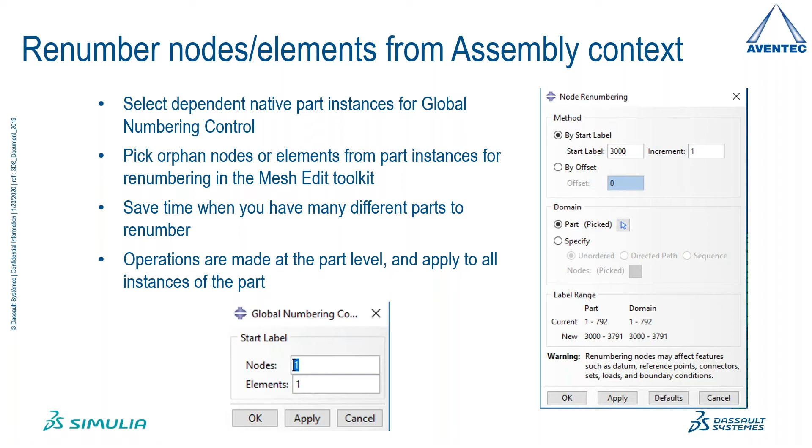Renumbering the nodes and elements from an assembly context is a nice upgrade as well. Now we can pick an orphan node or element from an orphan mesh, or even from a part instance, and start the renumbering according to a certain sequence. This feature is very important especially for folks that deal a lot with pipe elements and elbow elements, especially with the inclusion of the PSI elements, because the numbering is quite critical. So this is a very nice feature to consider.

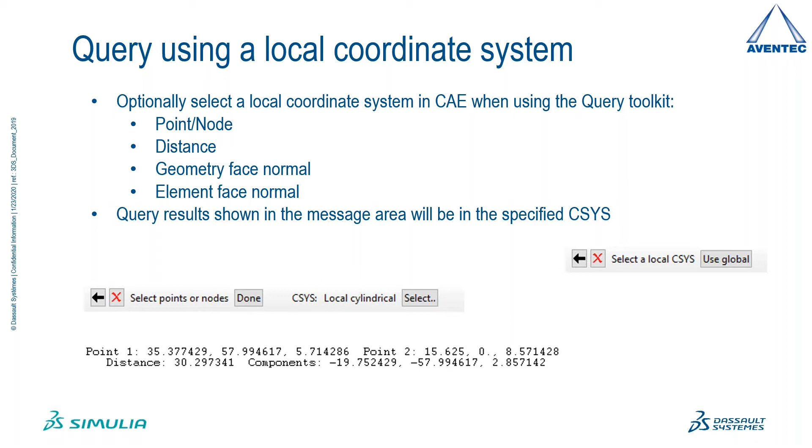Query using the local coordinate system. Prior to this release, we could only query in the global coordinate system, but now we could switch to the local coordinate system. And we could query based on point, node, distance, geometry face normals, or element face normals as well.

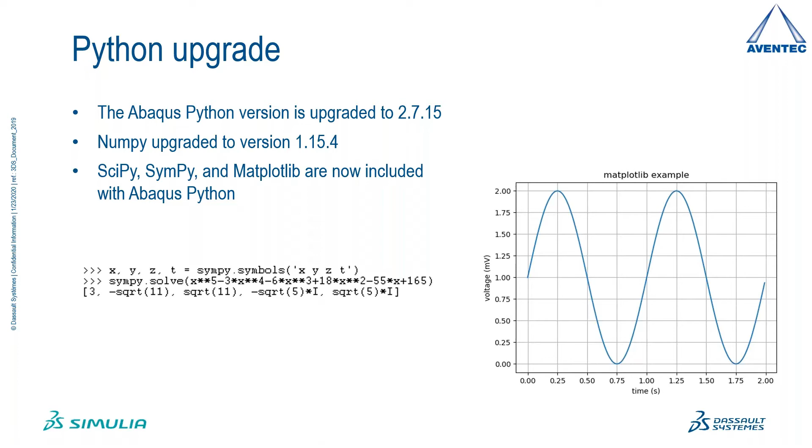For the folks that like to use Python within Abaqus, or a lot of us, we have our own scripts. So there was an upgrade to the Python version from 2.7.9 to 2.7.15. Again, not to the 3.4 as some of our clients anticipated. There's also the inclusion of the SciPy, SymPy, and Matplotlib libraries, which are now included with the Abaqus Python, and they're accessible through a command window.

Contact initialization for Abaqus explicit could be picked from the CAE window. Based on the creation of the contact initialization, the user can pick directly if the contact initialization is Abaqus standard based or Abaqus explicit.

And now the *TENSILE FAILURE material model is supported from CAE. In the past it was always a pain to include it in the INP file. This model is used in conjunction with the Johnson-Cook plasticity model, mainly in Abaqus explicit. And it's basically a sub-option for plasticity models or for equations of state for the folks that deal with smoothed particle hydrodynamics, for example.

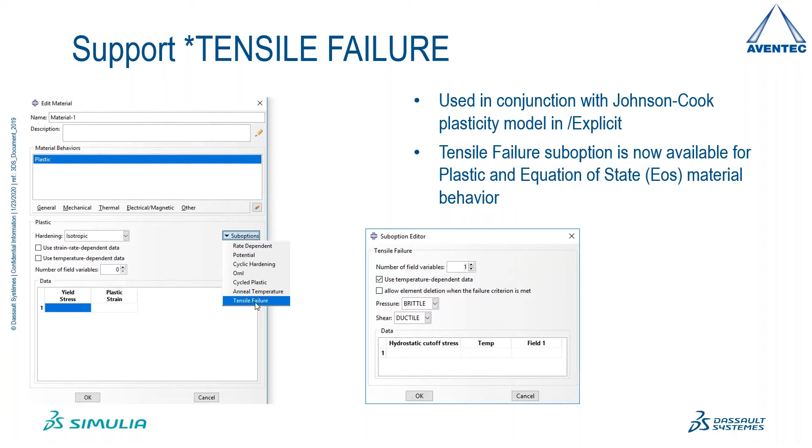The evaluation of Hyperfoam material test data. That feature has been there for a while, where we could evaluate material test data from viscoelastic and hyperelastic material models. Now we included the Hyperfoam material models as well.

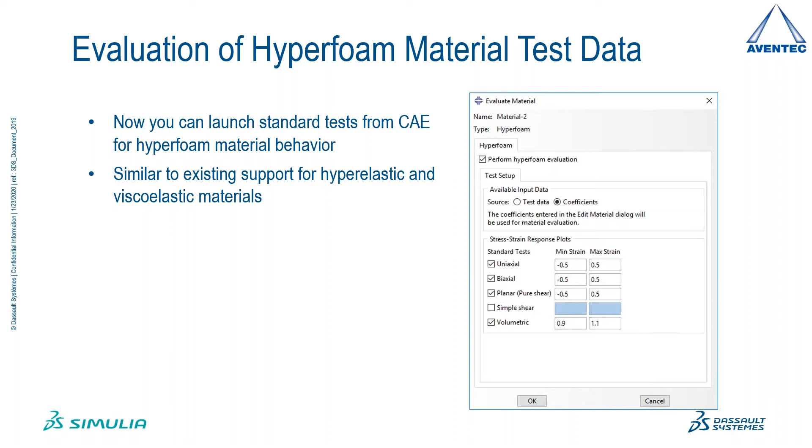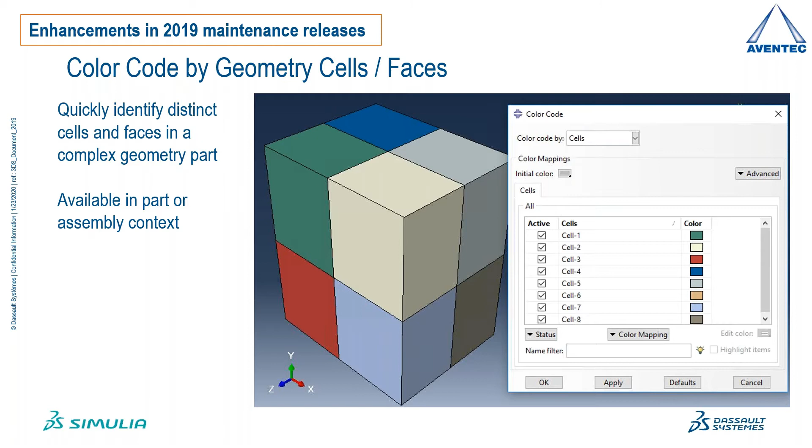The color code, which has been introduced in, if I'm not mistaken, the latest maintenance release of 2019, which is hotfix 3 or hotfix 4, pardon. So this partition or color code by geometry face can make the visualization easier, especially for complex geometries or even for complex assemblies.

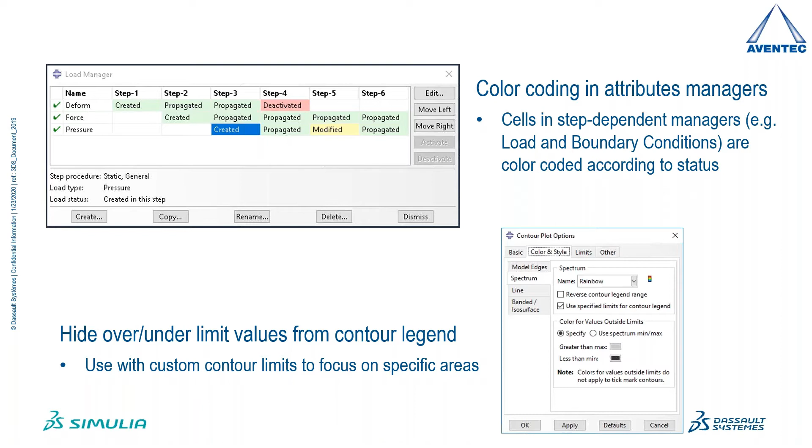And the color code in the attribute managers, for example, for the load manager, we can see that there's been the introduction of color coding based on red, green, and yellow: modified, deactivated, and active. This feature has been introduced in the Abaqus 2019 hotfix 3, so it's been available since last year's release, and it's been upgraded there. So that's basically the main features of Abaqus CAE.

Now we're gonna switch gears and talk about contact and constraints a little bit. So one of the main issues was to deal with the interference fit, especially for Abaqus explicit. We know that the Abaqus explicit solver handles contact problems with more robustness compared to standard for the most part. But when it comes to overclosure, sometimes we have a lot of issues, and it's been a little bit tricky to solve the interference fit for dynamic problems that are easier to solve with Abaqus explicit compared to Abaqus standard.

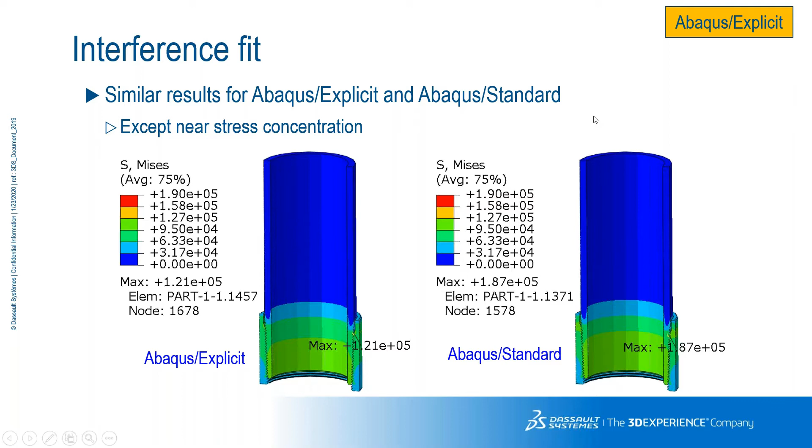Initialization control for general contact. Previously we used the keywords *CONTACT INITIALIZATION DATA and contact initialization assignments. These keywords were only applicable to Abaqus standard, and now they are available in Abaqus explicit as well. And these options also include the contact clearance assignments. The basic keyword specifications to treat initial overclosures, for example, for interference fit, are initialization, inclusions, exclusions, assignments, etc. So these keywords are also now available within Abaqus explicit.

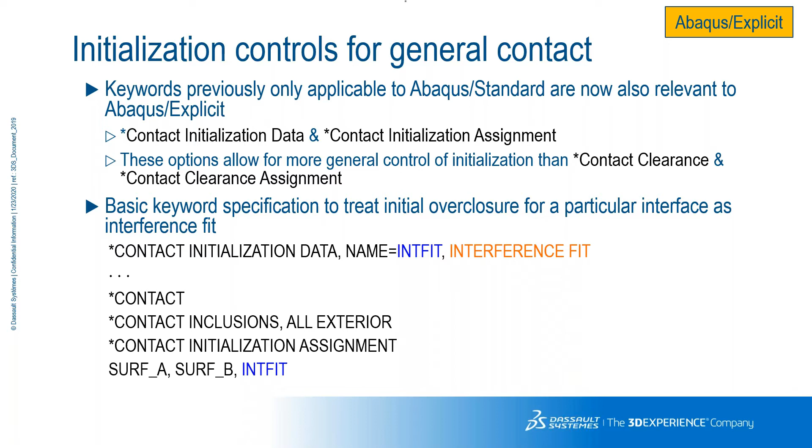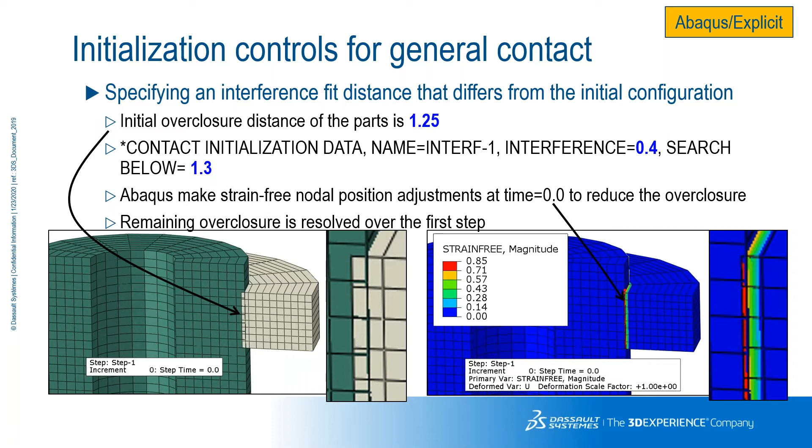So just carry on with the contact initialization controls for general contact. Now we can specify the interference fit distance that differs from the initial configuration, depending on a percentage of the initial overclosure. So we can include certain keywords to specify the distance. Again, these capabilities have been available for a while in Abaqus standard, and they are being included in Abaqus explicit in this current release.

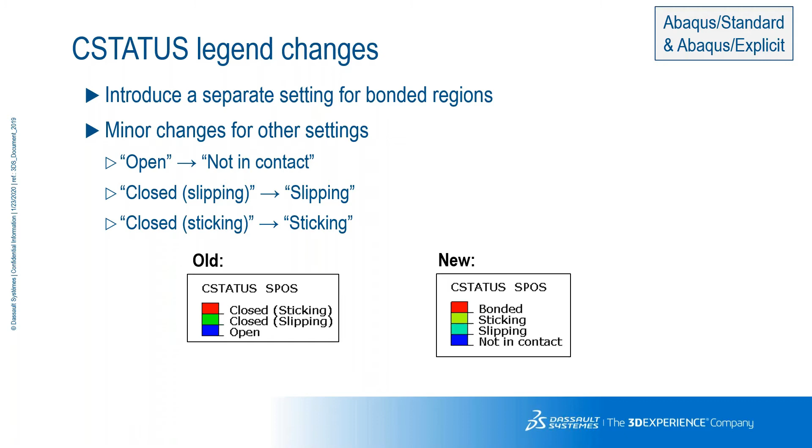The thermal expansion of rigid-like features. I know it might sound a little bit tricky, but sometimes we use rigid bodies to make our analysis quite lighter. And at the same time, we need certain information when it comes to thermal analysis, especially the thermal expansion, if you want to include it.

So now we could include this feature in the rigid bodies, kinematic coupling, beam multipoint constraints, and link multipoint constraints, which is very nice and useful, and it's comparable to or similar to the Nastran RBE2 capability.

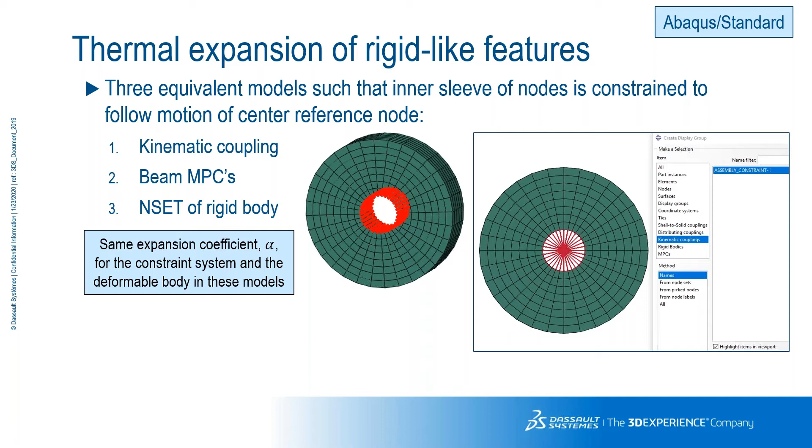So I'm just going to show a quick illustration here for the 3 equivalent models, such that the inner sleeve of the nodes is constrained to follow the motion of the center reference node. So there are 3 different ways to do it, either using a kinematic coupling or beam MPC or a nodal set of rigid body. And in these 3 different scenarios, we can still include the expansion coefficient as part of the simulation.

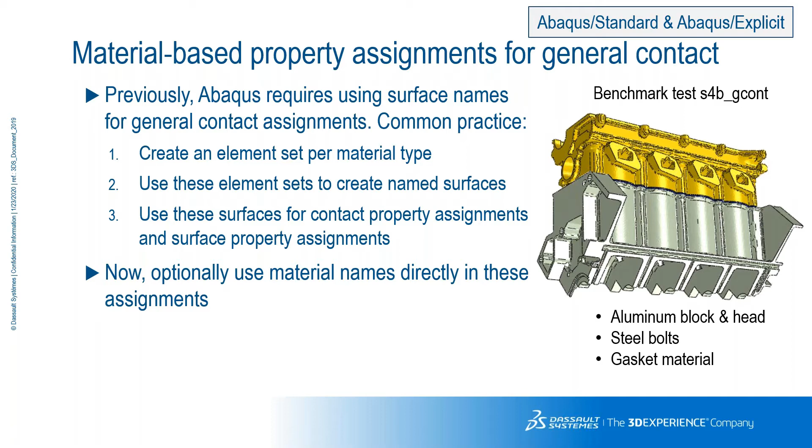Material-based property assignments for general contact. I remember a couple of years ago, 2018, and then upgraded in 2019, we talked about the friction coefficient material-based assignments. That was a nice upgrade for the general contact capability within Abaqus Standard, and also within Abaqus Explicit. Now we can also include the material-based property assignments instead of only section-based or part-based assignment. So from a general contact perspective, it would make life quite easier, especially for large assemblies.

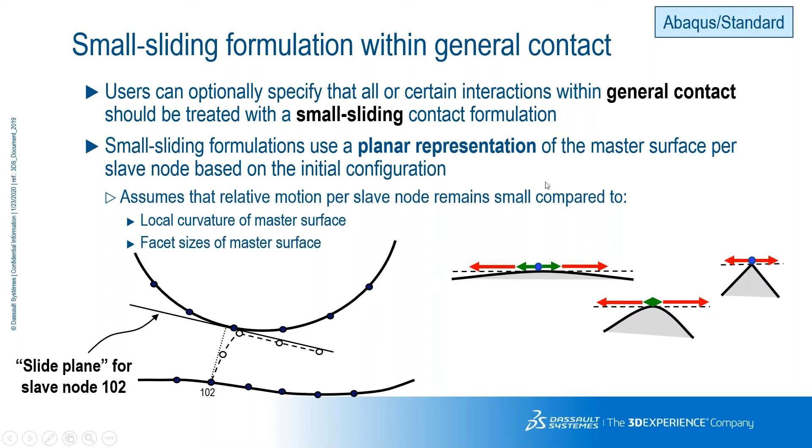Small sliding formulation within general contact has also been included. So of course, when we deal with general contact, we also have to keep in mind the way that the slave surface is moving accordingly or opposing to the master surface. So basically, we can distinguish between small sliding and finite sliding according to the convexity or if the surface is planar. So this consideration has also been included in general contact within Abaqus Standard.

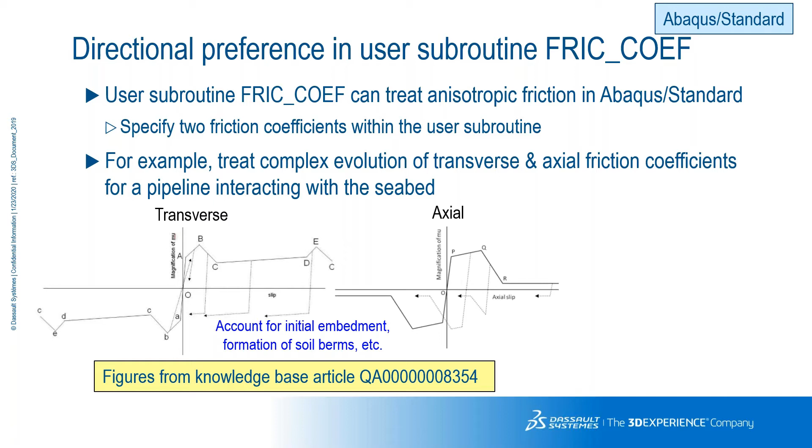And then, of course, there's a directional preference in the user subroutine friction coefficient that can treat anisotropic friction in Abaqus Standard exclusively. And then we can also specify two different friction coefficients based on, I would say, transverse anisotropy within the same user subroutine.

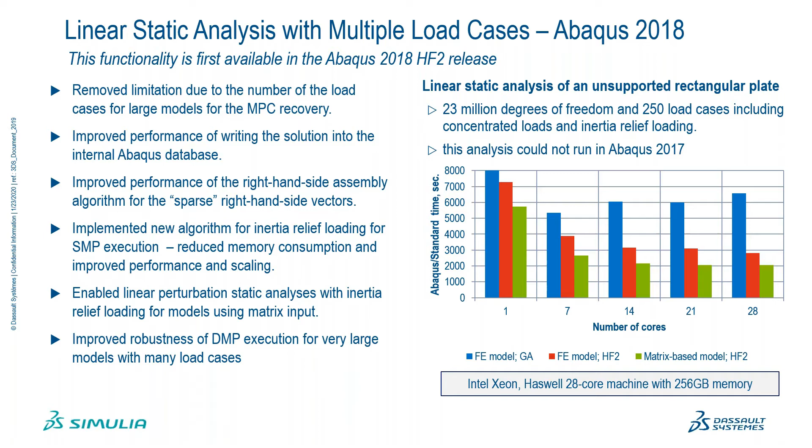Linear analysis: there is a nice concentration of effort when it comes to large models, where we don't have to use multiple-step models, but instead just one single step in a linear analysis, but with many load cases. So many efforts have been put towards removing the limitations due to the number of load cases for large models, and improving the performance of writing the solution into the internal Abaqus database, among other improvements. And these efforts have been going on for a while, since Abaqus 2017 up to 2019, the latest release, and have of course also been improved in the current release.

When it comes to linear dynamics, I could note a bunch of improvements. Some of them are quite deeply related to the solver technology that we're going to be talking about in a separate section later during this presentation. So we can talk about the large-scale eigenvalue extraction analysis, enhancements related to the residual mode functionalities that were introduced in Abaqus 2019, the hybrid CPU-GPU frequency response solver, and the improved result output performance in the modal analysis procedure, among other capabilities.

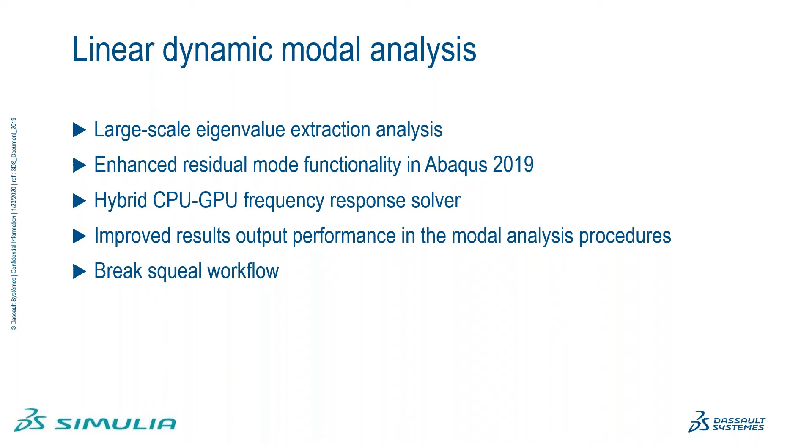For nonlinear mechanics, we're going to touch on 3 different sections, and we're going to start with element technology first. So there's the introduction of the new pyramid heat transfer elements. Back in 2018, we introduced the structural pyramid elements, which help a lot with the transition between brick or hex elements to tetra. And it was a very nice capability. Unfortunately, the capability is not yet available through CAE. So basically, there's a bunch of keywords that we have to consider in our mesh, in our input file.

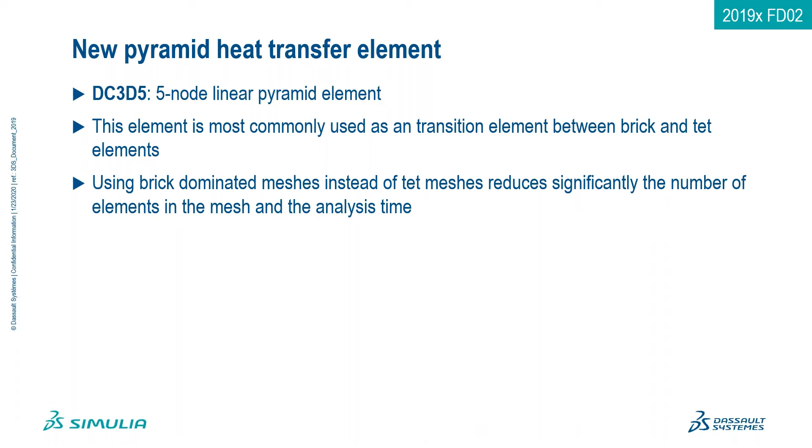So now this capability has been expanded to the heat transfer elements, basically considering the same philosophy of making the transition between brick or hex elements to tetra elements quite smooth and easy.

Improvement to fluid pipe elements. So now we can define the non-Newtonian viscosity behavior for the fluid flowing in pipes. We can define the Newtonian viscosity, power law, Bingham plastic, and Herschel-Bulkley.

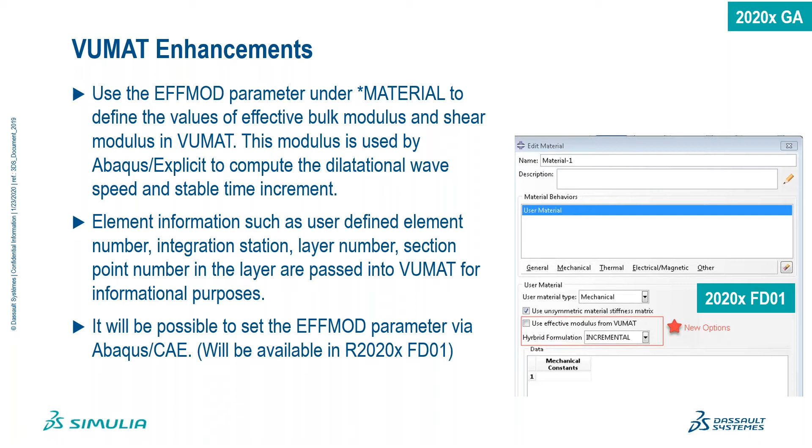When it comes to material enhancements, most of the focus has been oriented towards creep and yield material models. The first enhancement is related to the VUMAT, or material user subroutine, in Abaqus Explicit, where we can include the effective bulk modulus and shear modulus into the user subroutine. This modulus is used in Abaqus Explicit and can be included directly through the CAE, but within the user subroutine.

There's the introduction of the new yield surface of Chaboche, the rate-dependent yield. The keyword from the user interface is star plastic with hardening equals combined, and we can include cyclic hardening as rate dependent, with type equals Chaboche, which includes the rate dependency of the Chaboche law.

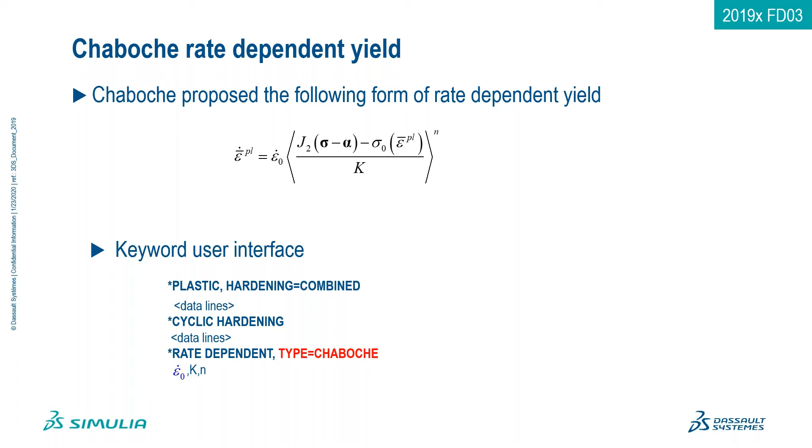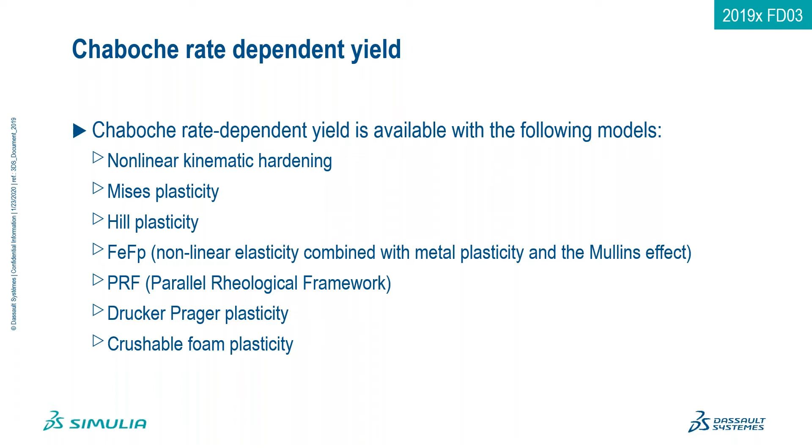This law could be used jointly with nonlinear kinematic hardening, Mises, Hill's, FeFp, PRF, Drucker-Prager, and crushable foam plasticity models.

There are also enhancements related to the creep models that already exist in Abaqus. We ran into many problems related to the parameters used in these models. Some parameters have non-physical units, which makes conversion tricky, and some parameters tend to be very small, which causes a high amount of numerical convergence issues related to these parameters.

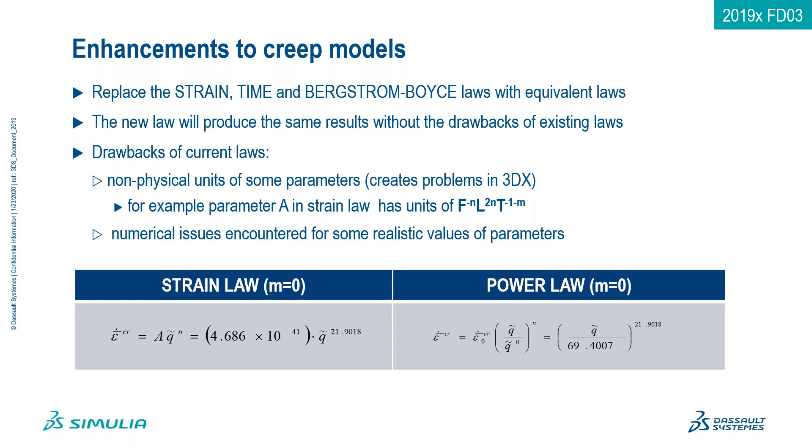So what we did is basically rewrite some of these material models. I'll give an example here: the current creep law, for example the time strain Bergstrom-Boyce. There's the current form, the new form, and the conversion between them. These two forms, the current form and the new form, are exactly equivalent—it's just a matter of making the conversion smoother, but the physics behind it is basically the same.

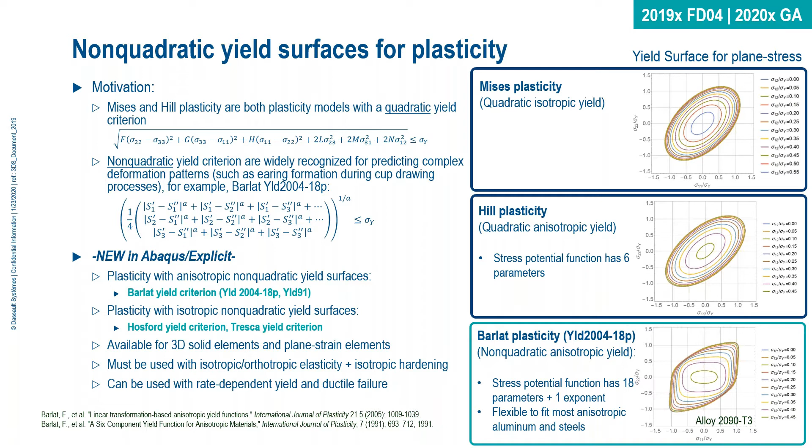There's also the introduction of the non-quadratic yield surface for plasticity, especially within Abaqus Explicit. This capability was introduced in the latest maintenance release of Abaqus 2019 and carried on to Abaqus 2020. Mainly, there's the introduction of plasticity with anisotropic non-quadratic yield surface, the Barlat yield criteria, and plasticity with isotropic non-quadratic yield surface, noted as Hosford yield criteria, and also Tresca.

There's also the introduction of improved capabilities behind the keyword star potential. In earlier releases, the keyword was only used to define the stress ratio for the Hill's stress potential function. Now we can define the coefficients for various stress potential functions, such as Barlat, Hill, Hosford, Tresca, isotropic yield, etc., within Abaqus Explicit.

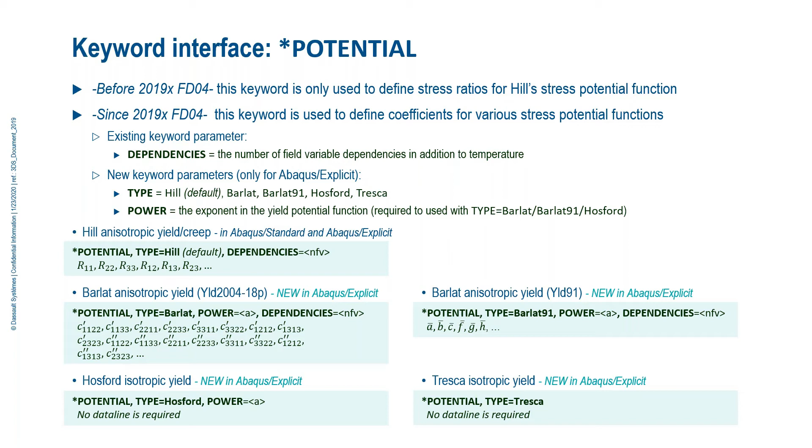There is also the modified formulation that was introduced back in 2018, in the latest maintenance release. Now this capability is also available through CAE.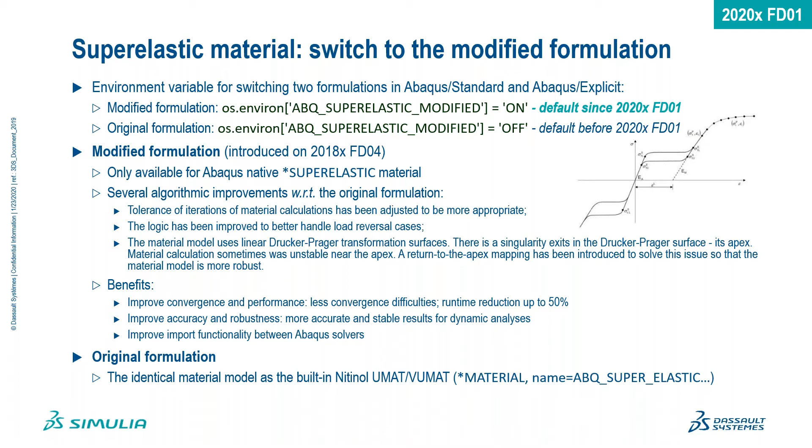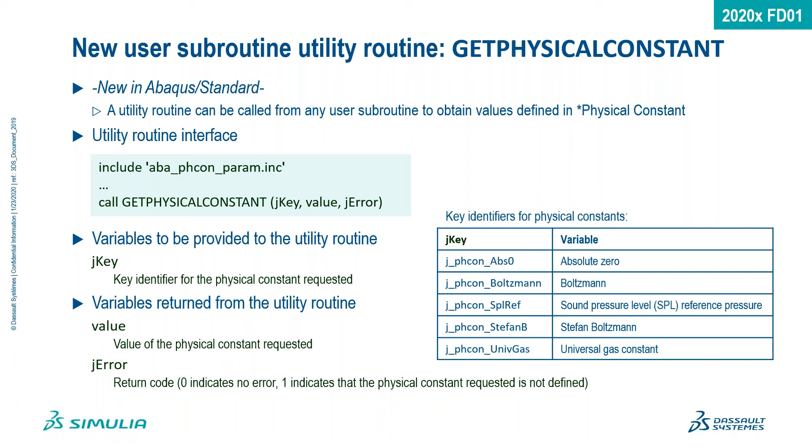There's a new utility subroutine, named GETPHYSICALCONSTANT, which can be called by any other user subroutine in order to obtain the values of the defined star physical constants. We can name variables such as absolute zero, the Stefan-Boltzmann constant, the universal gas constant, etc.

In terms of the prescribed assembly loads pretension section, I'm going to talk a little bit about the bolt load, or bolt pretension torque. Some of us are quite familiar with it when it comes to large assemblies where we use bolt tightening torque in order to apply what's called a pretension.

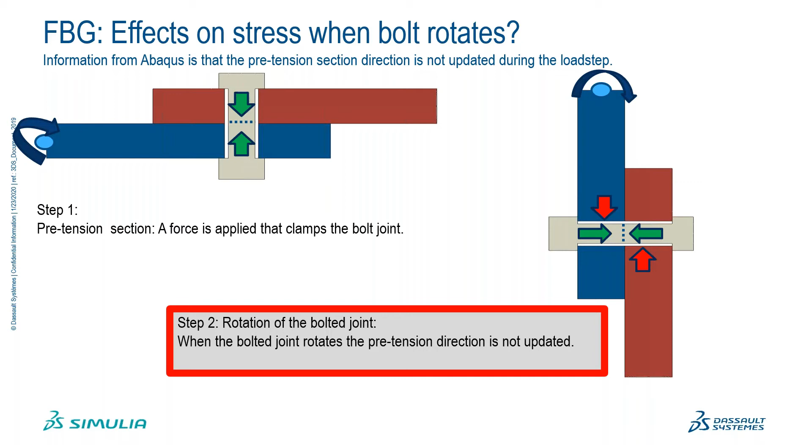This technology has been patented by HKS, before the Simulia brand, and is based on the assumption that the tightening torque is unidirectional, and the normal stays always normal to the pretension section facets, which is not very true when it comes to large rotations or large displacements. For example, with this lap joint, when we apply a pretension and then a large deformation, the direction of the pretension force will vary according to the rotation in space.

So the enhancement is related to this specific capability, where now we can introduce whether the force is a follower force or not. The keyword is star pretension section, and we can add follower equals yes or no if we want to include large deformations, large displacements, and large rotations.

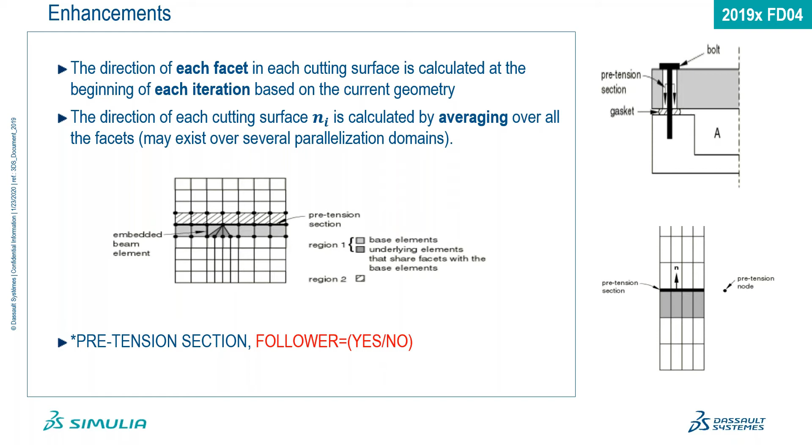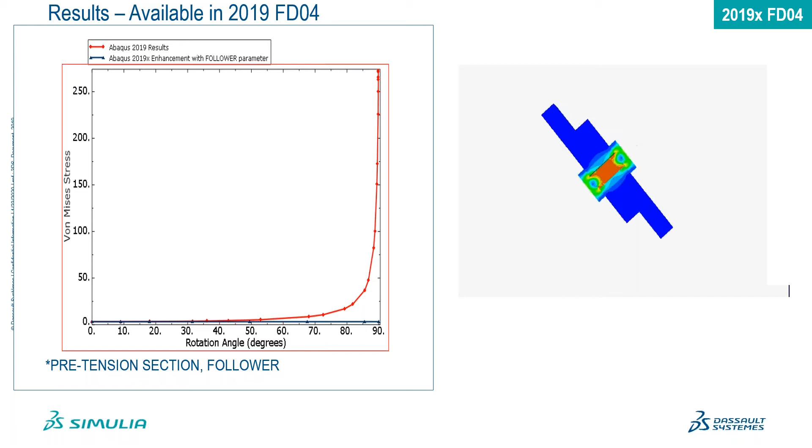It's just a quick animation of the same lap joint with and without the capability. So basically, the Abaqus 2019 results versus the Abaqus 2019X, which is the latest release where we introduced this capability. We can see how the von Mises stress distribution versus the angle of rotation stayed quite smooth as opposed to the older assumption.

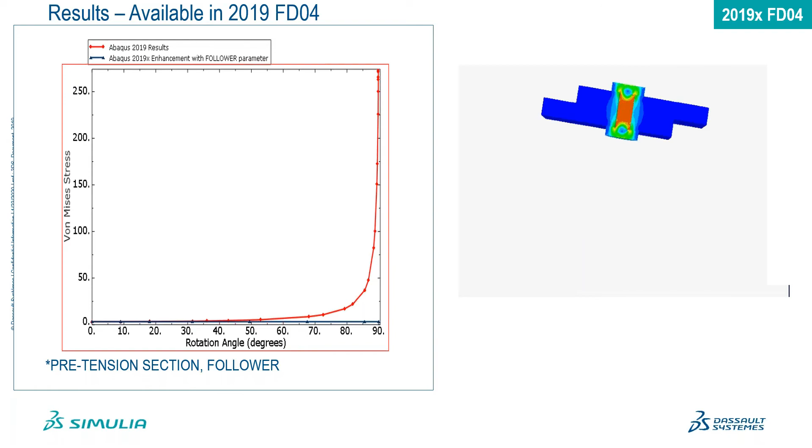Another hot topic that I'm more excited to talk about today is fracture mechanics. We focused the development of the different fracture mechanics capabilities more towards fatigue crack growth, especially for low cycle fatigue with high amplitudes, coupled thermal displacement cohesive elements, and thermal pore pressure displacement elements.

So let's talk a little bit about the fatigue crack growth analysis. Last year for Abaqus 2019, we introduced a specific procedure under STAR fatigue, which specifically works as part of modeling the cyclic loading, mainly high cycle fatigue, which supports mixed mode fatigue loading, among other stuff.

There was a tremendous effort put towards enhancing this capability, mainly improving the accuracy under mixed mode loading, obtaining the mesh independent smooth crack front, which is part of the effort put towards developing the XFEM technology. I remember last year we talked about the introduction for the first time of crack branching, so this capability is being pushed more forward.

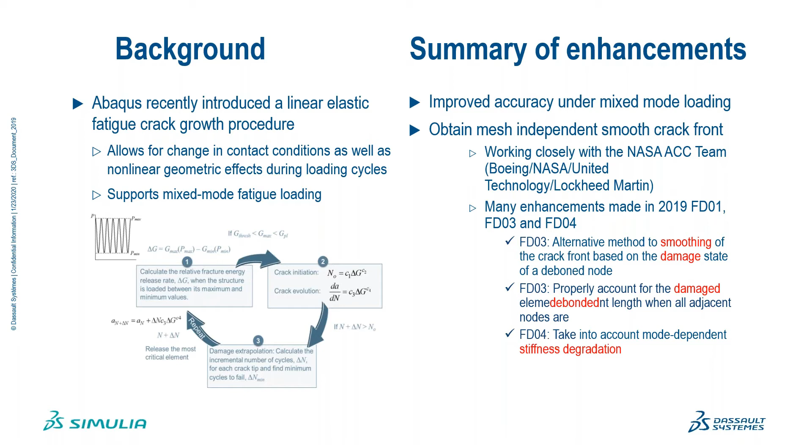We can talk also about the alternative methods of smoothing the crack front based on the damage state of the debonded node, properly accounting for damaged element debonded length when all adjacent nodes are debonded, and also accounting for mode-dependent stiffness degradation.

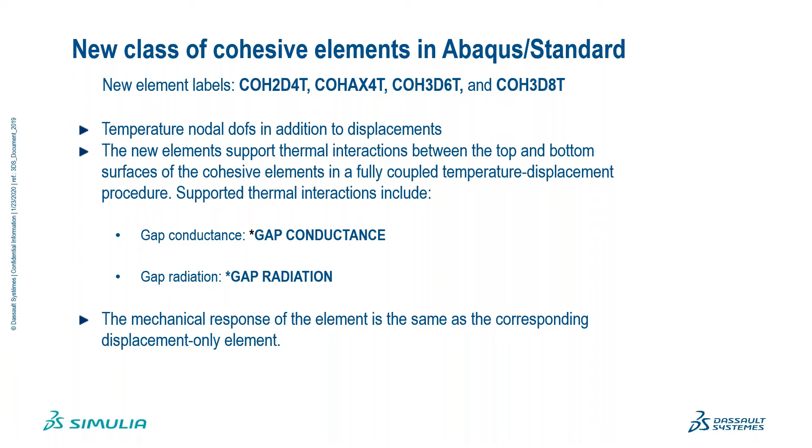Coupled thermal displacement cohesive elements have also been introduced, which is a very nice capability. It makes life easier when we deal with complex or multi-physics simulations which include cohesive elements. Coupled thermal pore pressure displacement cohesive elements are also being introduced. So these libraries are unfortunately only accessible through input file.

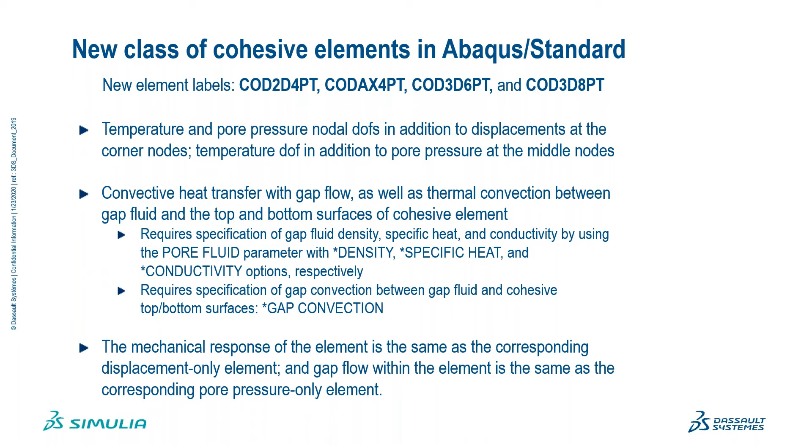Again, there's a huge push forward to make these libraries available through CAE as well. In terms of Abaqus explicit...

We're going to talk about element robustness improvements, specifically oriented towards the distortion and DT-based element deletion, which is backed by the fracture mechanics efforts, linear kinematic conversions for continuum elements, as well as the improvement of the C3D8 incompatible kinematics. So when it comes to the distortion and DT-based element deletion, for material undergoing extremely large deformations, the element may become distorted, or as we call it, have negative volume, which may occur more on a numerical aspect, even before the material reaches the yielding point.

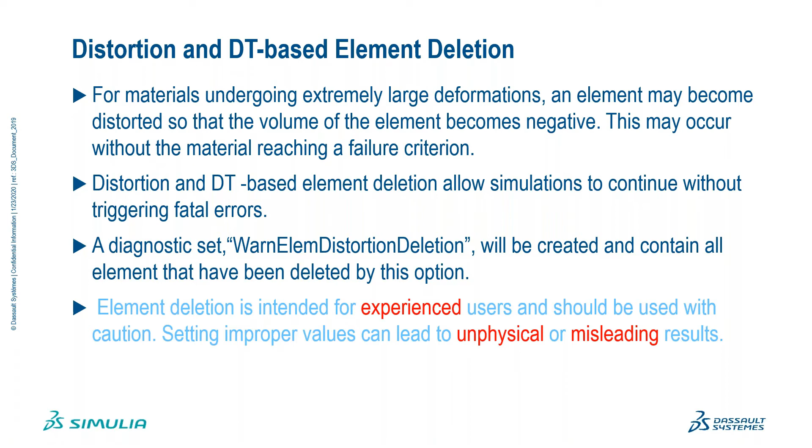The element deletion is basically intended to remove these elements from the simulation in order to push the convergence forward. We have to be careful because it's more intended for experienced users and should be used with caution, because setting up improper values can also lead to non-physical or even misleading results.

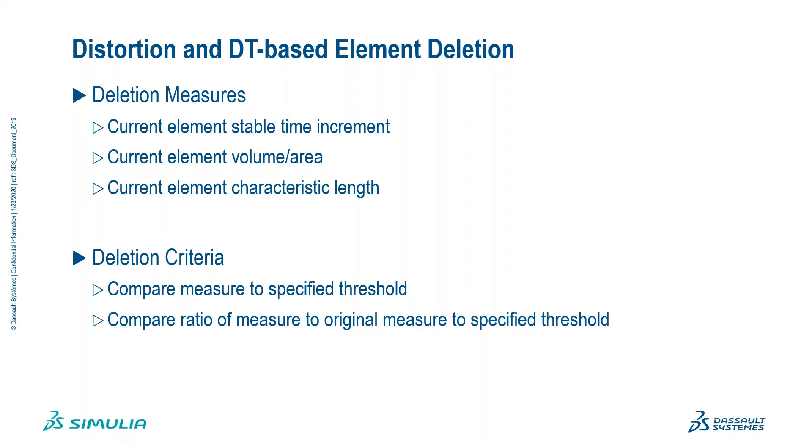For deletion measures, we can talk about the element stable time increment when it comes to Abaqus explicit, the volume, area, and the characteristic length, because these are the main parameters upon which the solver bases the stable time increment for dynamic or even quasi-static analyses. We have to compare the measure to a specified threshold, and compare the ratio of the current measure to the original measure to the specified threshold. The keyword used is section controls, delete distorted element.

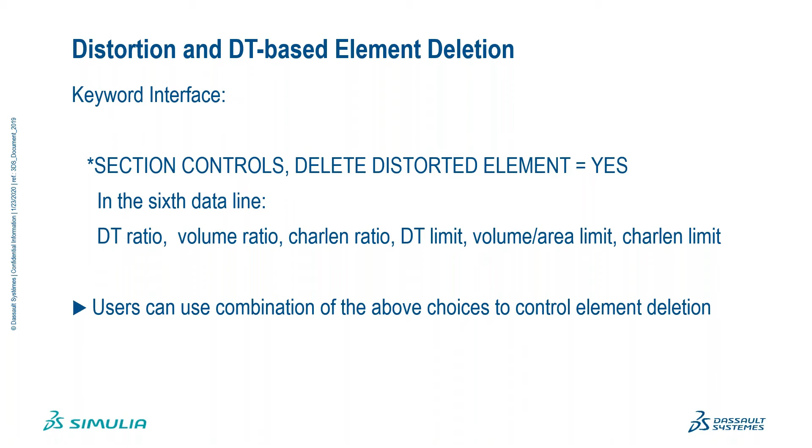Yes, just this is not to be confused with the element deletion when we deal with damaged elements. This technology is basically used more to help with convergence rather than solving a damage-related problem. So that's a little bit to avoid the confusion.

Then the linear kinematic conversion: when the element becomes highly distorted, there are currently two options. Trigger the fatal error and end the simulation, which is what the solver is going to do, or we can delete the elements. The new option is basically to convert the element to behave linearly. It's going to compromise the analysis a little bit if we're dealing with a high amount of nonlinearities, but it's going to help us at least get an idea or a sense of where the simulation is going.

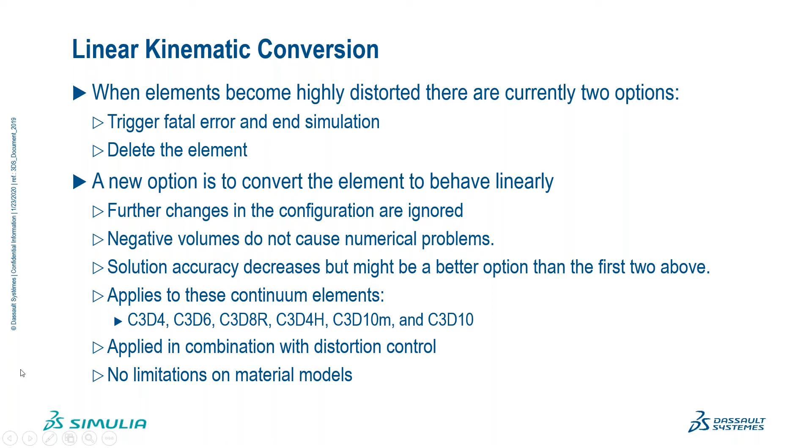The keyword is basically section control: name of the section, distortion control, yes or no. We can define the length ratio, which requires specifying a ratio value. The default value is 20%, and the length ratio cannot be more than 80%, otherwise we're going to trigger certain convergence issues.

I can also talk about the improvement of the C3D8 incompatible kinematics, which is additional incompatible modes that were already implemented in Abaqus Explicit to make the formulation consistent with Abaqus Standard. We also removed the bilinear pattern in the hydrostatic stress for approximately incompressible material.

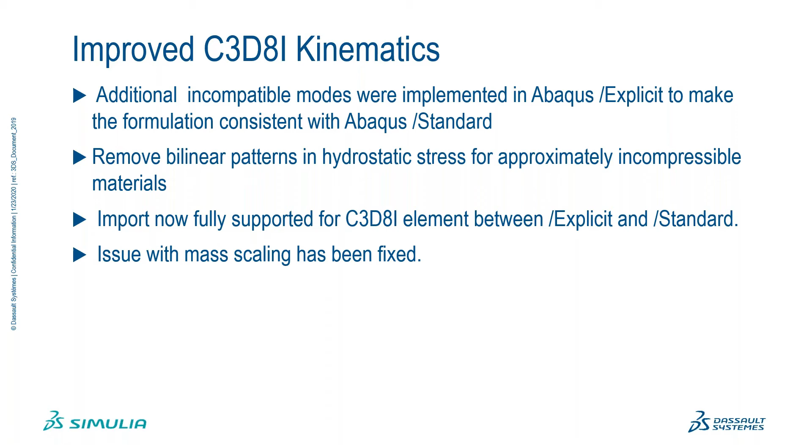Whenever we deal with highly incompressible or quasi-incompressible materials, we tend to use hybrid elements, but in some scenarios that's not the ideal solution. Now the incompatible mode elements can help with convergence when solving this class of material. Here's a simple example comparing Abaqus Standard formulation using incompatible mode elements to Abaqus Explicit, and the issue solved with the additional incompatible modes incorporated into the new elements, showing the convergence comparison between the two models.

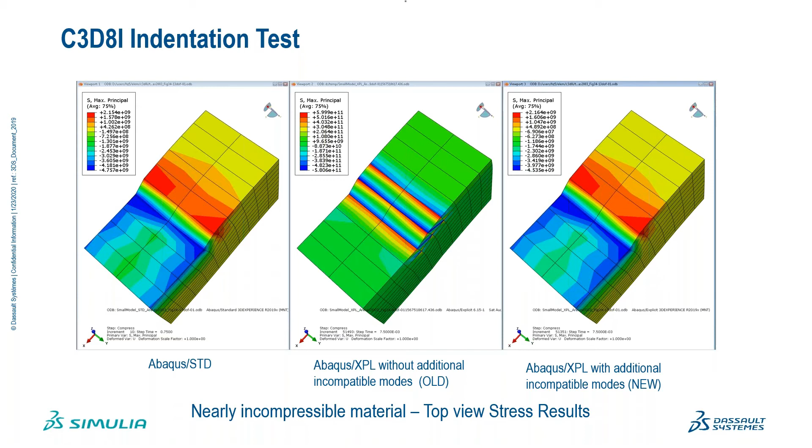In terms of the contact leakage for the coupled Eulerian Lagrangian capability, which is one of my favorites when it comes to very large deformations and large distortions, we used to have issues with rapid dynamic simulations, like ballistic explosions. The problem is labeled as gas leakage, which can occur under high pressure gradients and flow rates tangential to structures, sharp corner areas in a structural mesh, large motion of the structural mesh through the Eulerian domain, or a combination of all of the above.

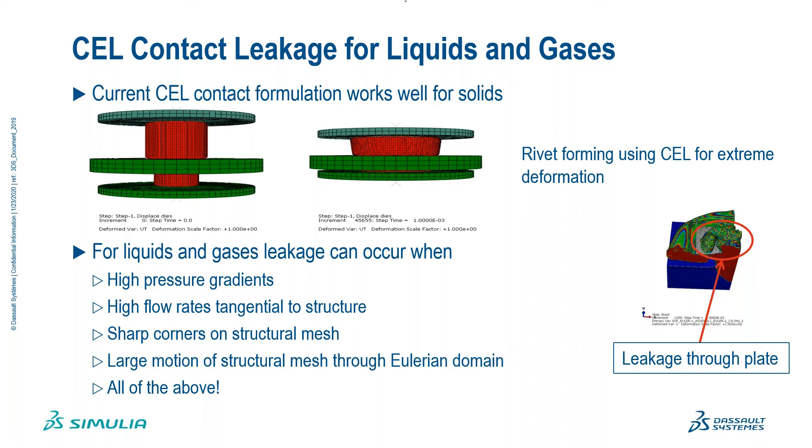As part of the enhanced CEL coupled Eulerian Lagrangian contact formulation, there was tremendous effort towards improving these bug-related issues, which can now be used with both solid and shell elements. The structure should be thick enough to avoid multiple surface intersections at the same Eulerian element. Leakage may still occur where a single CEL element is intersected by multiple surfaces, which we label as T-intersections. Shell surfaces must have different materials on opposing sides. The enhanced formulation is more expensive than the default formulation in both CPU time and memory usage.

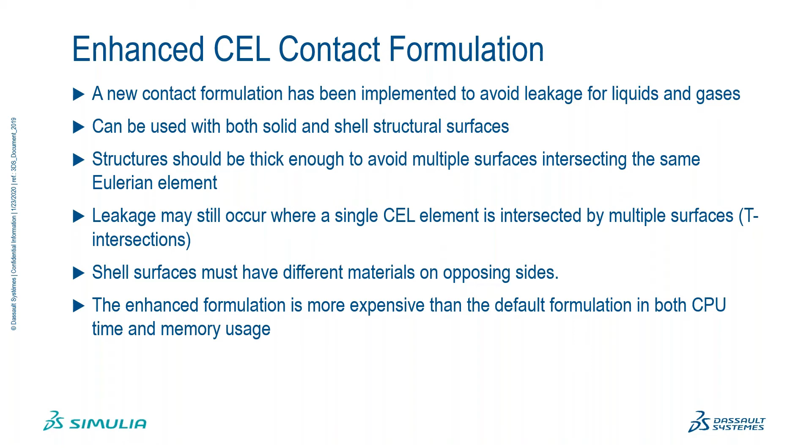The keyword is star adaptive mesh refinement, element set name, and enhanced contact, yes. It's basically as simple as that. The default is enhanced contact equals no, so you just switch it to yes.

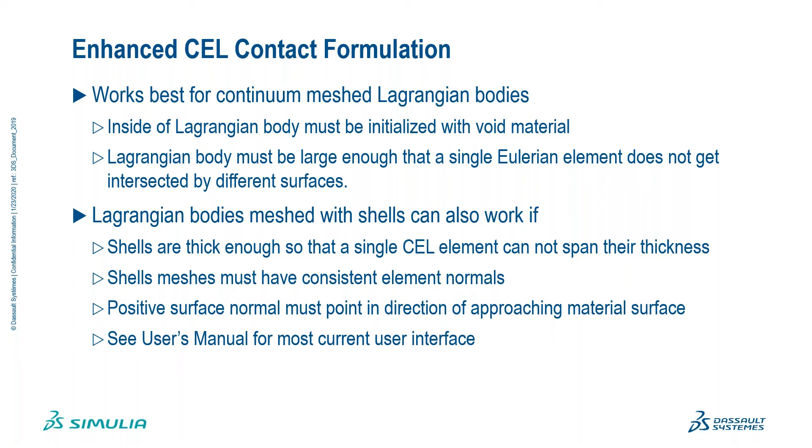The enhanced CEL contact formulation works best for continuum meshed Lagrangian bodies. The inside of the Lagrangian body must be initialized with void material, and it must be large enough that a single Eulerian element does not get intersected by different surfaces, as mentioned previously. Lagrangian bodies meshed with shells can also work if the shells are thick enough that a single CEL element cannot span their thickness, and shell meshes must have consistent element normals. We have to be careful when dealing with shells that switch curvatures, or cylindrical shaped shells, regarding element normals. Positive surface normals must point in the direction of the approaching material surface.

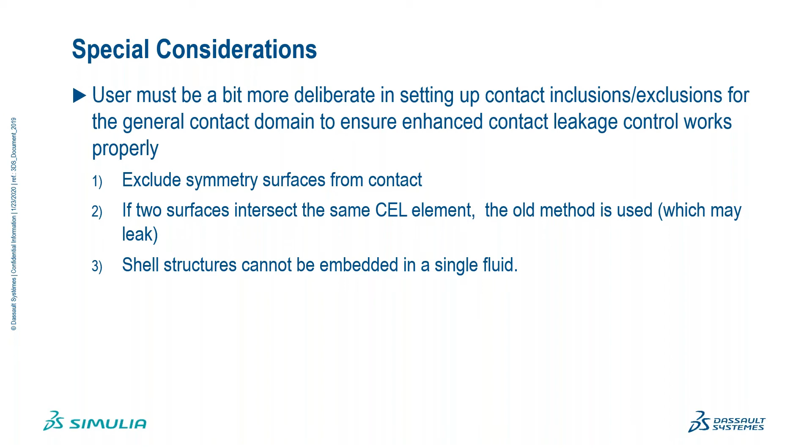A couple of specific or special considerations: exclude the symmetry surface from the contact. If two surfaces intersect the same CEL element, the old method is used, which may trigger some leakage, and shell structures cannot be embedded in a single fluid.

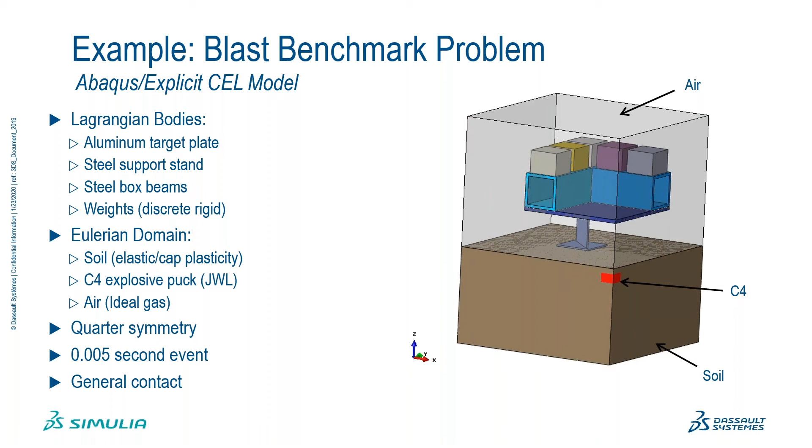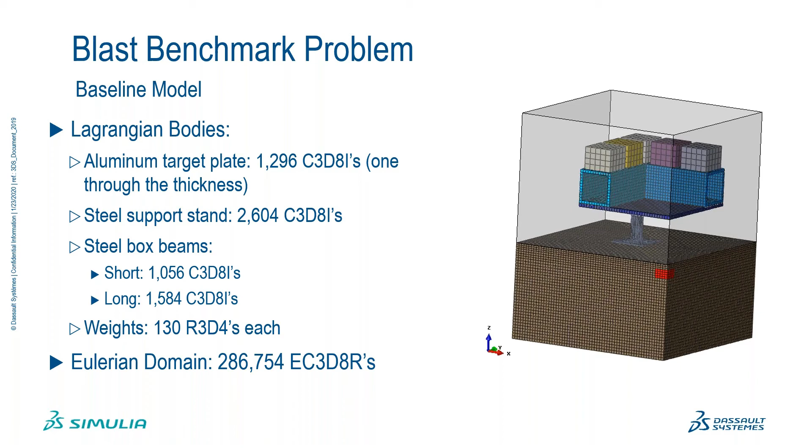A nice example to illustrate the CEL improvement is a blast benchmark problem. We have a bunch of Lagrangian bodies, basically aluminum, steel support, steel boxes, and weights on top of the steel box, modeled using discrete rigid elements. Then we have the Eulerian domain, which consists of soil, air, and a C4 explosive puck. We considered quarter symmetry and a 0.005 second event, using general contact. Here's a quick glance at the type of elements used in the Eulerian domain and Lagrangian domain.

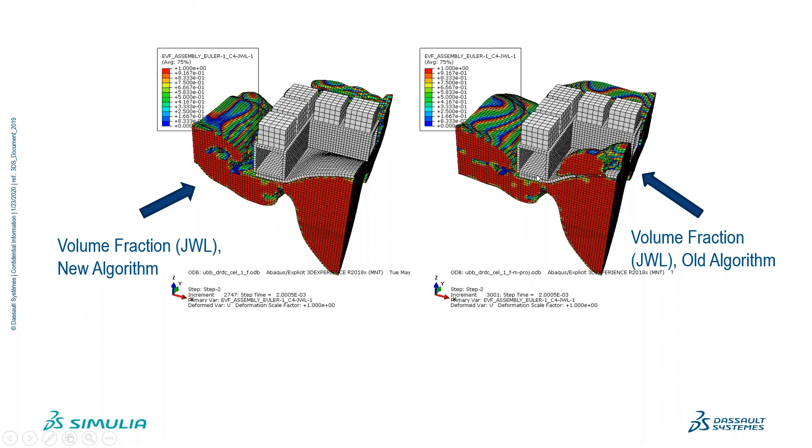And going further into the step, we can see the amount of leakage we're having through the steel elements compared to the volume fraction. It's very considerable. And towards the end of the simulation, we can see how, I don't know if I call it leakage, or just the whole physics is being screwed up here because of that convergence problem related to the leakage issue.

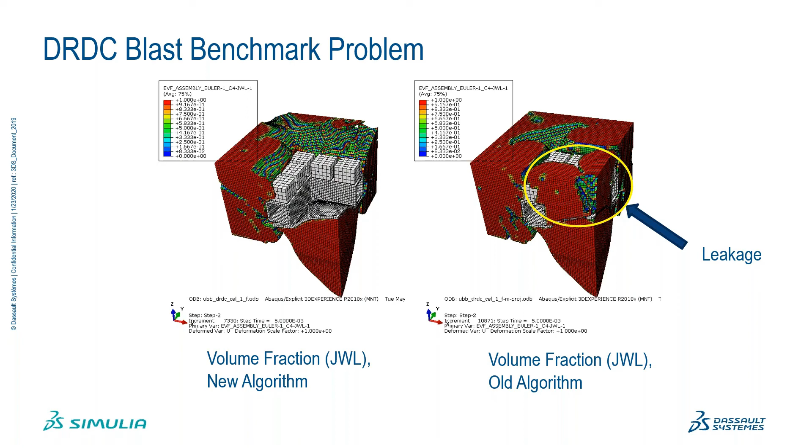In terms of Abaqus Explicit enhancements, we introduced the new hybrid MPI, or message passing interface, that is now available in Abaqus Explicit. We introduced this a couple of years ago in Abaqus Standard, back in the days when it was hot technology. I know a lot of us don't really deal with very high fidelity, extremely large problems, but some of our customers have been dealing with 5+ million degrees of freedom, and this hybrid technology has been making their life quite easier for Abaqus Standard, and now it's being

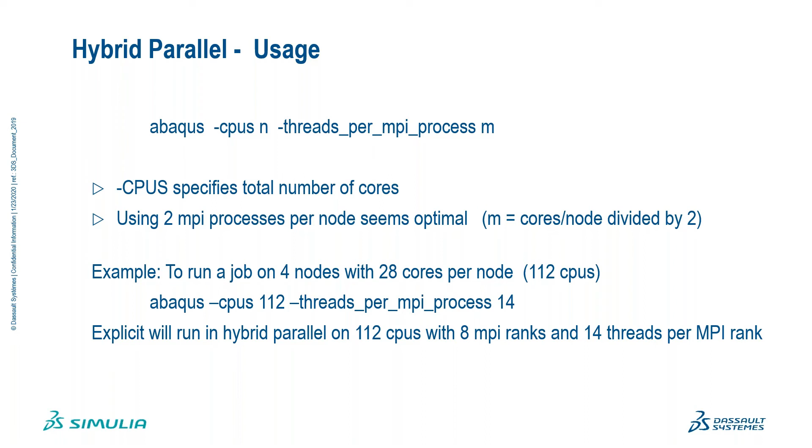incorporated in Abaqus Explicit. It can be used simply from a command line, hybrid parallel running, using 2 MPI processes per node seems the most optimal case. There are no restrictions on the MPI types. You could use Intel or IBM, both work with no restrictions for high performance computing. The performance is basically optimal at core counts between 40 and 200. But again, it's very problem dependent.

Sometimes we might find that parallelizing a problem makes things more complicated. Sometimes it might make them easier. So it's a very problem-related approach, I would say. It will also work on a single node and single process using multiple threads.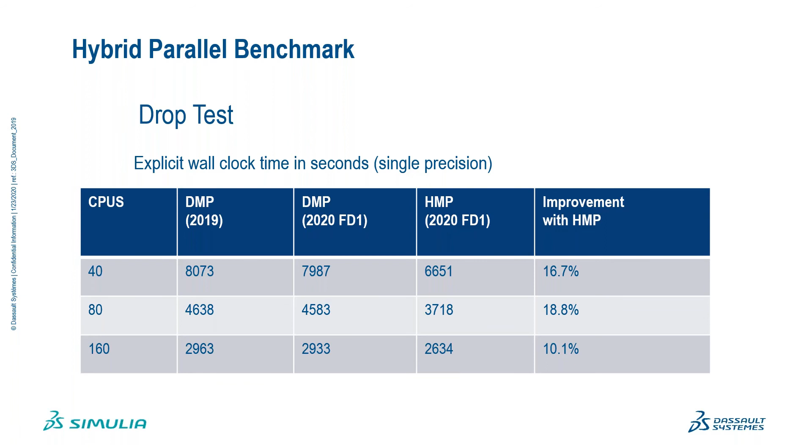So this is just a very simple drop test comparison between the DMP, the distributed message passing interface, old technology, and then the DMP with enhanced technology, and then of course the hybrid technology. So we can see the improvement: 16, 18, and 10%.

Capacity improvements in terms of the explicit packager have also been incorporated. I did not want to include so many examples here, just for time purposes, in order to make this presentation as light as possible. But now we can do a crash analysis of 8 cars in a parking lot without an issue in a very reliable manner.

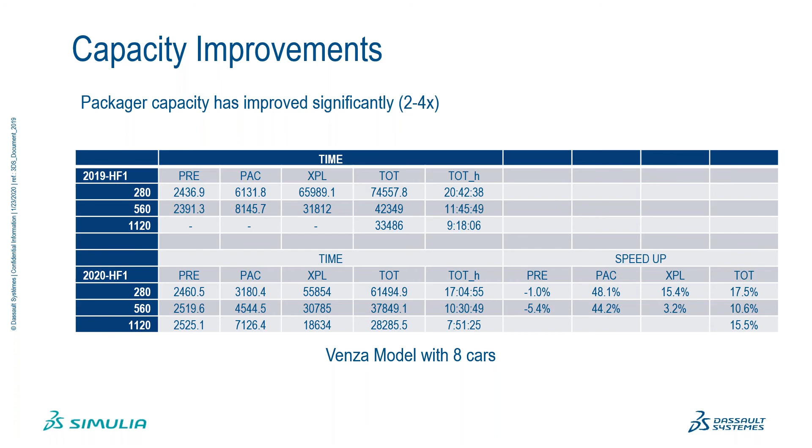Parallel scaling enhancements have also been introduced in order to reduce some issues caused by node share with many domains, specifically a common issue when it comes to large rigid bodies. Optimized rigid body contact communication most of the time makes the models quite lighter, quite efficient in terms of run. But the issue is basically when it comes to contact between several rigid bodies. So these capabilities have been introduced to improve this. The beam multi-point constraint spiders are now handled more efficiently in general contact.

And now we're going to talk a little bit about the solver technology before we wrap up. Basically, we're going to talk about the constraint preconditioned iterative solver. Back in Abaqus 2018, we introduced the iterative solver, and I remember back then in my presentation I did a huge section comparing the iterative versus the direct solver and the efficiency of the iterative solver versus the direct solver.

There's a drawback when it comes to small size models. Small size means the number of degrees of freedom. So under a million degrees of freedom, we don't really see that much power as opposed to 10 or 15 million degrees of freedom.

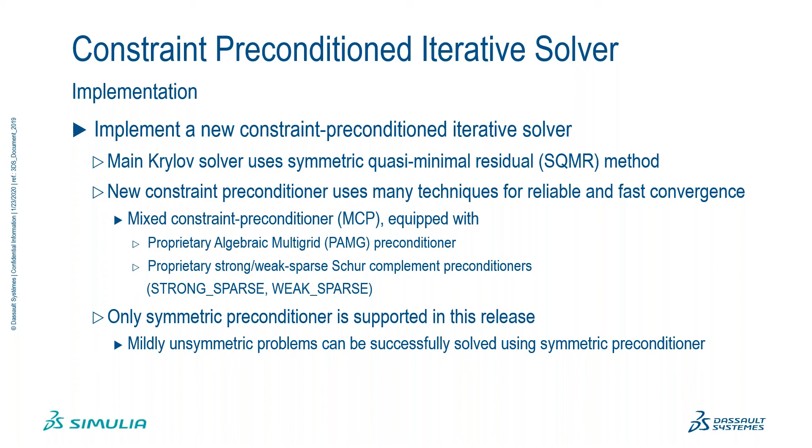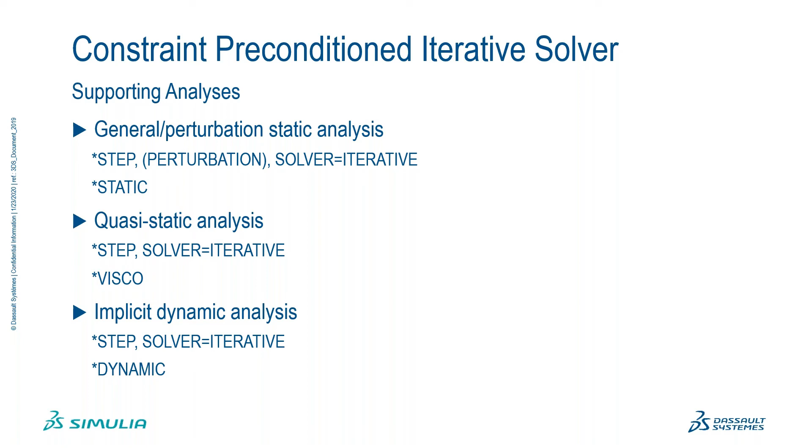So now the constraint preconditioned iterative solver can support many general procedures. Basically, we can just incorporate solver equals iterative at the step level, and then do a *Static. We can do the same thing for quasi-static analysis and also for implicit dynamic.

There are a few limitations that I would like to highlight here. The iterative solver generally cannot solve a problem reliably if the direct solver issues the following messages. If we have a negative eigenvalue or zero pivot, that's more related to the problem definition, or the model definition, like boundary conditions and the whole setup of the model. Numerical problems or singularity warnings may pop up, but again, that's more related to the problem definition and not to the solver's incapability of solving the whole model.

The iterative solver cannot solve the problem if the model is over-constrained, and it may experience convergence problems due to preconditioner setup failure. And of course, the asymmetric matrix is not fully supported. We deal with this when we are dealing with highly nonlinear contact issues, where we engage the unsymmetric matrix, which can definitely help with some classes of problems. So keep in mind that the iterative solver cannot be engaged in those scenarios. And the geostatic procedure and coupled pore fluid diffusion and stress soils procedure analyses are not supported yet for models with Lagrange multipliers.

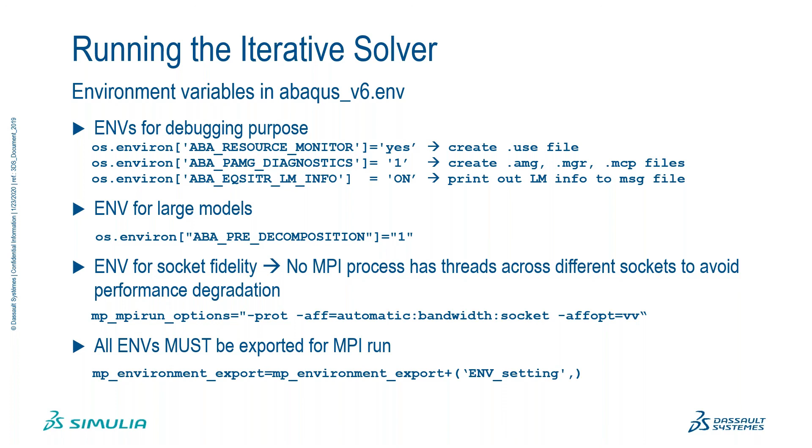Running the iterative solver incorporates a few tricks and modifications to the environment variables in the Abaqus_v6 environment file. I would really consult with myself or one of my experienced colleagues before you go ahead and play around with the environment file, because it's very crucial. If there is any error or anything messed up there, it can definitely affect the whole solver stability and the whole installation of Abaqus itself on the machine or server you're using.

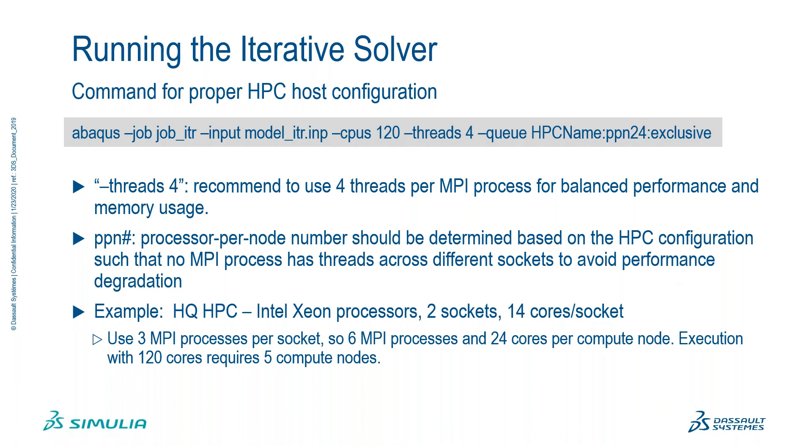So the command for proper HPC host configuration, I just put a line. I know it might sound crazy that I engage 120 cores, but it's just to showcase how the line could be included.

Just to touch base quickly on the performance of the iterative solver. An example I put here incorporates a powertrain model with hard contact. The number of elements is about 4 million, the number of nodes is about 6.3 million, and the number of degrees of freedom is about 18 million. The number of flops is about 280 trillion.

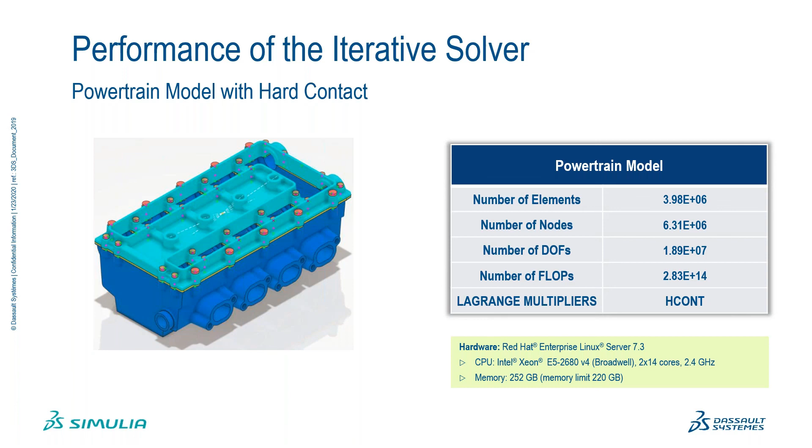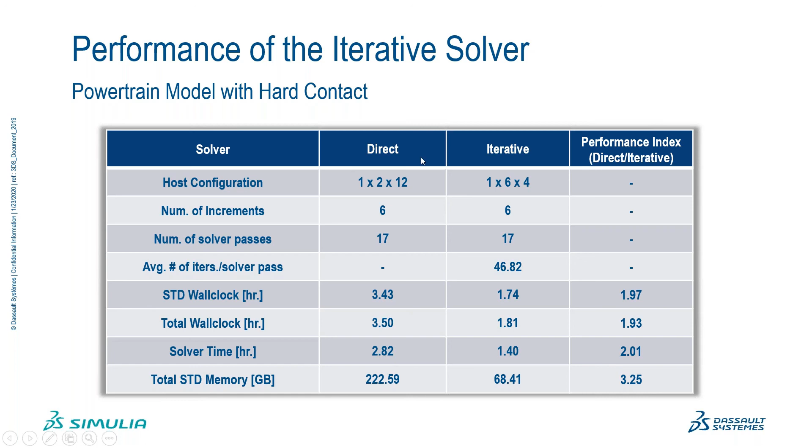We went through different configurations, mainly a comparison between the direct solver and the iterative solver, and introduced the performance index of direct versus iterative, including the host configuration, the number of increments, the number of solver passes, the average iterative solver pass, and the standard wall clock time in hours. We can see how the iterative solver is by far better. It's much faster in solving this class of problems with more efficiency. The results are basically the exact same; the convergence ratios were exactly the same values, except we're getting better convergence in terms of time with more efficiency.

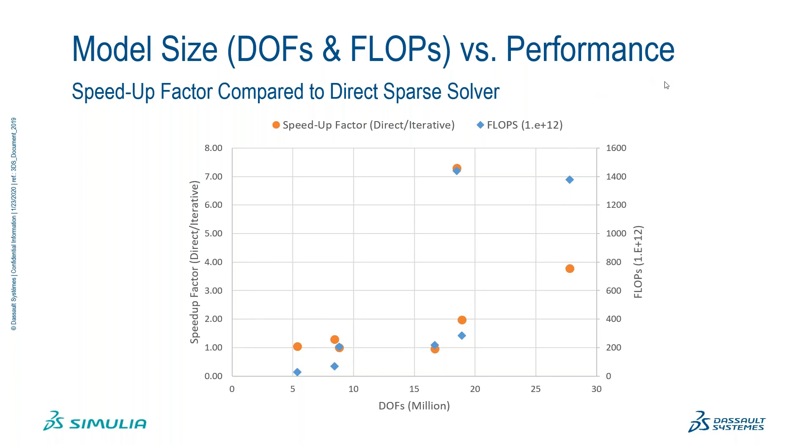Again, as I mentioned at the beginning of the last section, the drawback is related to the size of problems. If we're dealing with a very small problem, engaging the iterative solver might even slow down convergence as opposed to making it faster. It's very problem dependent. Starting from a small number of degrees of freedom, about 5 million, we can see the scalability go up as we move towards larger models, and we can have a speed-up factor of about 6 to 7 sometimes.